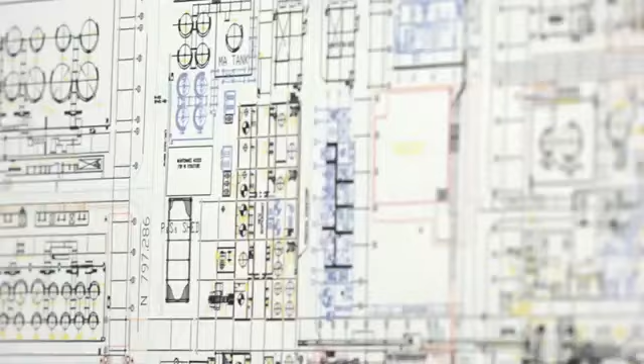Over the years, we invested a lot in our operational excellence because we believe that everyone who comes into the plant every morning can go back safely in the same physical condition. This is what our values and who we are. And we also believe that reliability in the plant is very important, because once we commit to production and delivery, we make sure that we meet the commitment.

In the areas of efficiency, it relates to energy efficiency and also waste minimization. This is part of our contribution to sustainability. We make sure that we are efficient in how we utilize natural resources and minimize the waste that we produce in the plant.

As we learn more about digital technology, the more amazed we are. We do believe that in order to make the next leap in terms of operational excellence, digital transformation and digital technology will probably bring us there. And we develop a roadmap in terms of digital transformation.

Safety is a core value in Chevron. We look at means and ways of improving accessibility to the high-risk plant areas. Physical fencing of the facility may not be appropriate because it will prevent access to evacuation. So we have to look at different solutions.

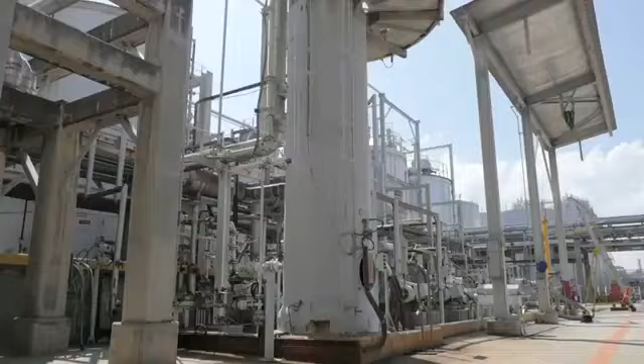There are additional challenges that we have to overcome, such as controlling access to areas when there is high-risk operations. In addition, we want to make sure that if there is an injury, the injured person can notify us of their location, as well as for us to be able to locate an unconscious individual in the case of emergency.

To solve these challenges, we look at several alternatives and options and consider that real-time locating system, RTLS, is the best solution. So in summary, RTLS, which is part of our digital transformation journey, has helped us in a few ways.

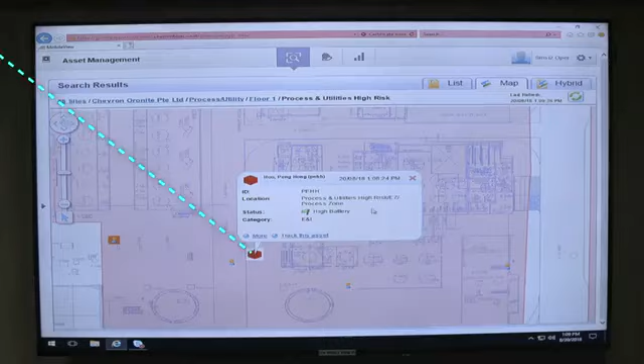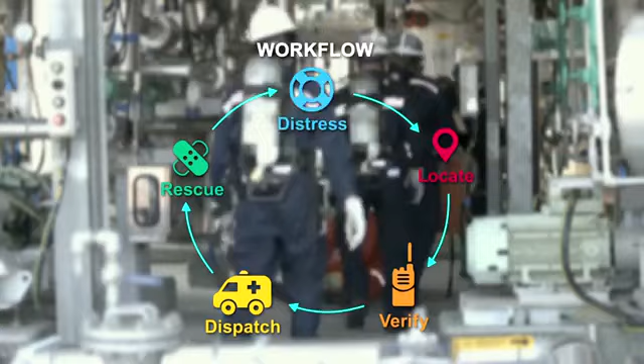One is to make our emergency response process more robust and efficient, by ensuring that we actually know where to locate an injured person or unconscious person. Second, we also have control over high-risk activities to ensure that employees and contractors are not in the wrong place at the wrong time.

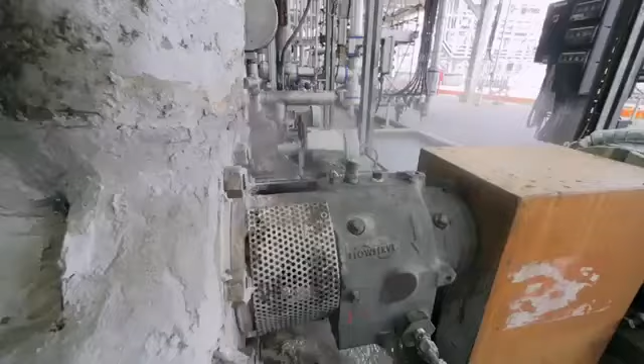In the past, conducting steam surveys had been a challenge due to the large number of steam traps available in the plant. Wireless acoustic sensors are then installed onto the steam traps at various locations, and the data is fed into analytical software to provide continuous monitoring of the steam trap conditions.

As a result of digital transformation using energy management applications, we are able to detect steam trap failures and replace steam traps early to reduce steam losses, resulting in energy saving.

In the past, we relied on portable testers to do manual vibration data collection. But this is not an efficient way to detect the early signs of problems, and furthermore, this requires expert know-how to interpret the data accurately.

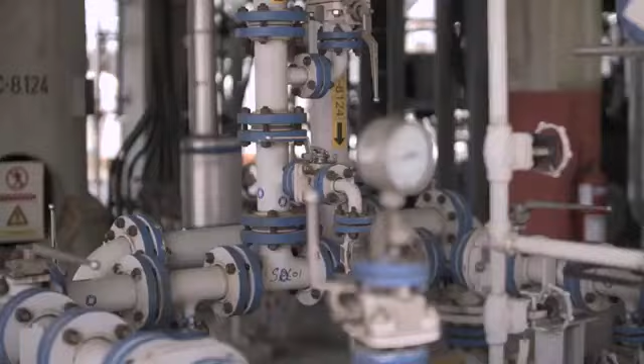Integrity management relies on manual portable testers to do UT measurement on site. But the downside of this is that test locations sometimes cannot be repeatable, especially when you have different inspectors doing the job, and infrequent data collection. This can end up with inaccurate determination of the corrosion rate and the remaining life of the equipment.

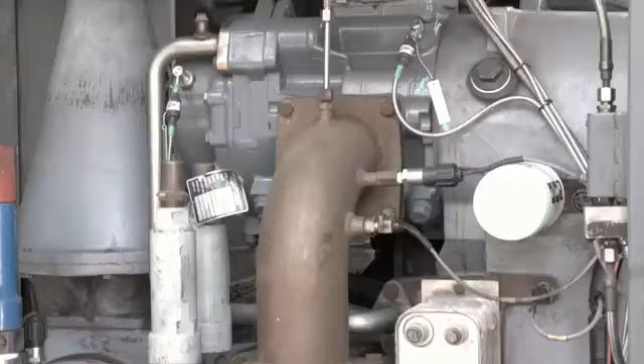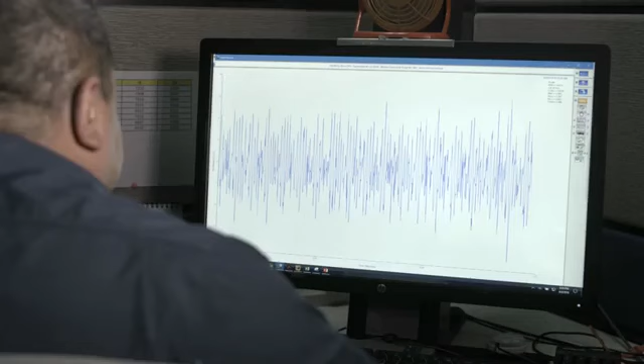Since we are deploying into the wireless infrastructure, by leveraging on this, we can simply install additional sensors to do vibration monitoring wirelessly. The vibration data will be wirelessly transferred to the vibration analytics software that allows the engineer to do further assessment based on the data.

Several corrosion sensors were installed on some of the selected critical pipes and integrated with the corrosion analytical software.

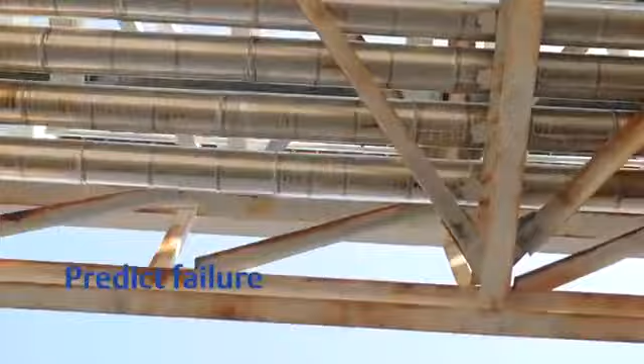We have improved the plant reliability and integrity as a result of the digital transformation on how we maintain the plant. We are able to better predict the failure of the pump and compressor and take early action against it. This has helped us to reduce the plant downtime and the repair cost in the long term.

We are able to better predict the failure of the pipe and vessel, and more accurately predict the corrosion rate and the remaining life of the equipment. At the same time, this helps us optimize the piping replacement.

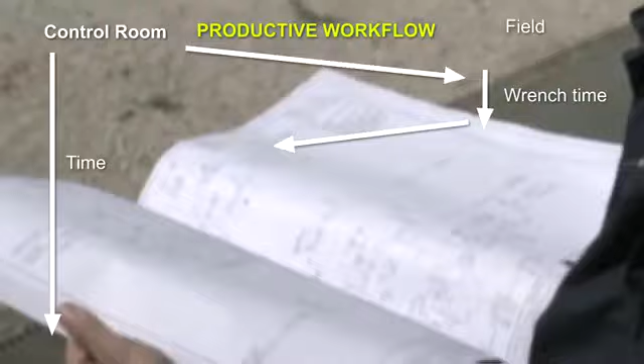Previously, while working in the field, technicians needed to come back to the control room to draw the P&ID and verify the line, and then go out again, which was time consuming for them.

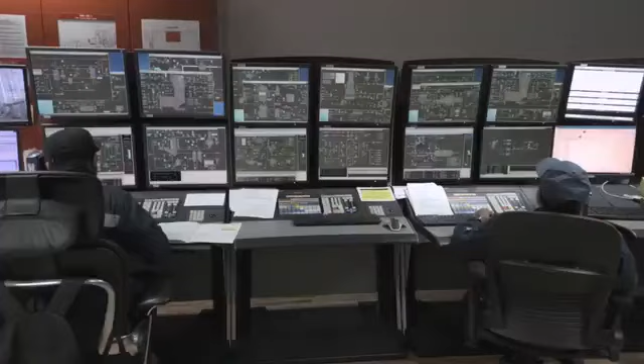Another example is when people go out to the field and encounter issues with some of the equipment. They need to come back to the control room, raise SAP notifications, and verify everything, which is also time consuming and wastes time.

We purchased many hazardous certified tablets suitable to use in our plant. These connect to the Wi-Fi network in the plant, and they can run software and access the web server. They also allow opening documents on the go.

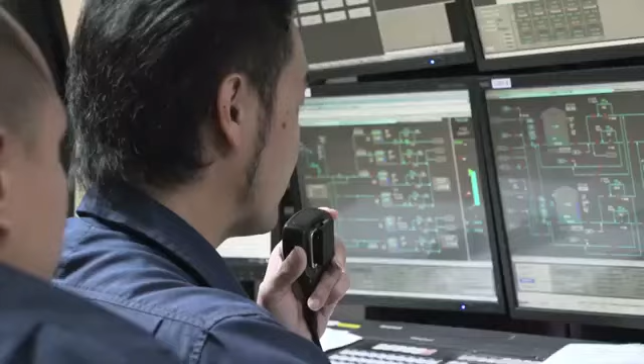These tablets come with an inbuilt camera, so workers can take videos or photos. As a result of digital transformation of operations, workers in the field become more productive because they can spend more time in the field.

Digital transformation of field work in maintenance and operations requires data access to IT systems. So when we talk about IT systems, it's about the SAP system, process and project documentation work. IT is still responsible for supporting the IT infrastructure and ERP.

Nevertheless, we use the Purdue model as a point of reference. That's where OT and IT integrate at level 3.5.

Yes, I agree with you, Vic. IT and OT have our own areas of expertise and domain knowledge, which we can leverage upon and work collaboratively. The departments are independent, but they work together on the digital transformation project. The key is understanding the differences and leveraging the expertise of each other.

We have taken a first step in digital manufacturing by installing the right infrastructure to improve safety, reliability, efficiency, and productivity. In fact, we have plans in place to expand our wireless coverage throughout the plant.

In my opinion, the key to successful digital transformation starts with small steps to address business needs. Having said that, I think having a partner that we can believe and trust to deliver the results and provide the solutions to our needs is very important.